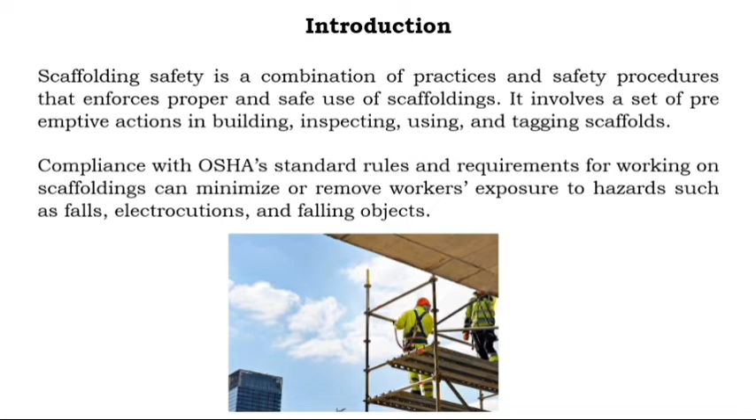Scaffolding components: first, sole plate; second, base plate; third, standards; fourth, ledgers; fifth, bracing; sixth, decking; seventh, guardrails, that is handrails and midrails, height approximately 1 meter; eighth, toe board, should be minimum 6 inches in height; ninth, clamps standards EN 74 and BS 15; tenth, the ladder shall be secured at 3 locations; eleventh, tags, either green or red, and shall be renewed after 1 week.

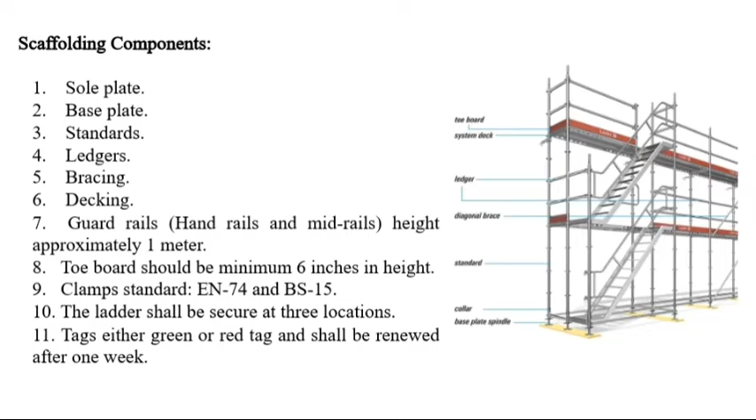Following photos showing scaffolding components.

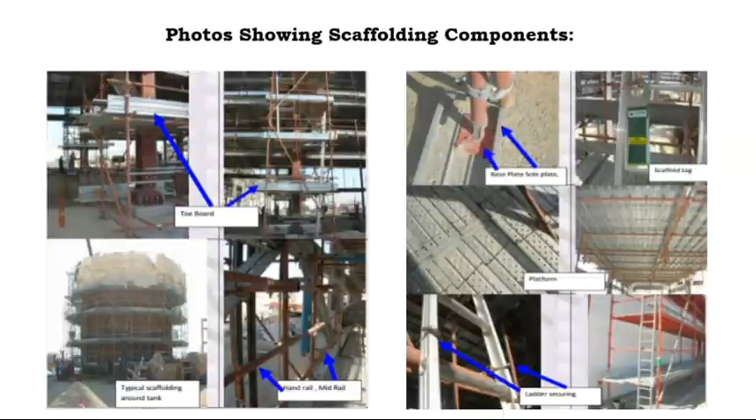Importance of scaffolding safety. Scaffolding safety is important because it can help prevent workplace incidents from recurring. With baseline scaffold requirements to keep workers safe, such as better inspections, training, and controls, frontline teams can ensure scaffolding safety and be proactive about building a safety culture from the ground up.

To ensure scaffolding safety, the scaffold must be built under the supervision of a competent person, someone who has been thoroughly trained on safe work practices when working on scaffoldings, and workers must be trained by a qualified person before they use the scaffold. The scaffold and its components should also be checked by a competent person and properly tagged before the start of the shift to ensure its integrity and safety.

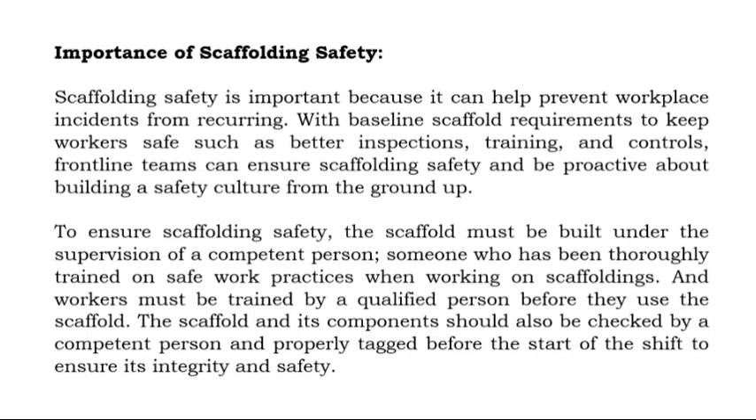Three types of scaffolds. First, supported scaffolds, a type of scaffold that is supported by poles, frames, and outriggers and usually consists of one or more platforms.

Second, suspended scaffolds. Like the supported scaffolds, this type also usually consists of one or more platforms, but is suspended by overhead support and ropes.

Third, other types. These are man lifts, hoists, etc., which are often referred to as machinery and vehicle type of scaffold.

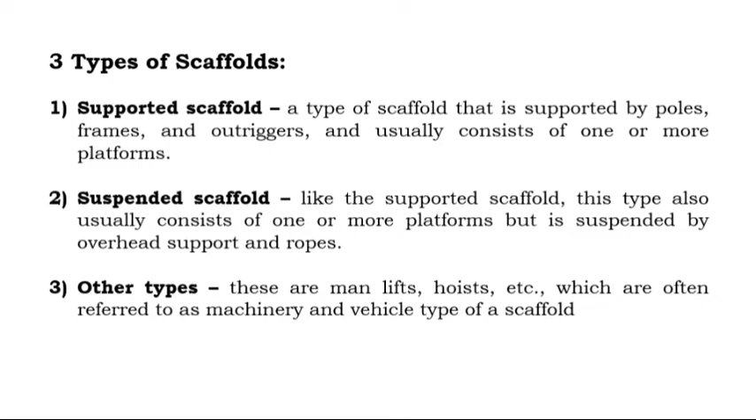Scaffolding rules. Here are the highlighted rules of OSHA's scaffolding standard. First, fall protection. Employees that are more than 10 feet off the ground need to be protected by using fall arrest systems or guardrails, except for employees on single point and 2-point adjustable suspension scaffolds. These employees should be protected by using both guardrails and a personal fall arrest system.

Second, guardrail height. The height of the scaffold's top rail that was manufactured and used in service after January 1st, 2000 should fall between 38 inches and 45 inches. Before this date, the scaffolding standard was 36 inches to 45 inches.

Third, cross bracing. The cross point of cross bracing used as a top rail should be between 38 inches and 48 inches above the work platform.

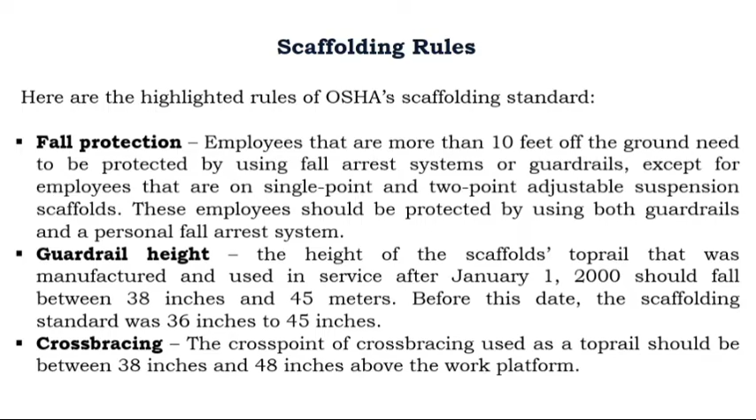Fourth, footings. Scaffold footings have to be leveled and have the capacity to support the loaded scaffolds. The legs, poles, frames, and other upright components should carry the weight of the base plates and mud sills.

Fifth, platforms. Scaffolds that are supported should be fully planked or decked.

Sixth, guying, ties, and braces. If the height to base ratio is 4:1, there should be support to the scaffolds to prevent tipping by guying, tying, and bracing.

Seventh, capacity. Scaffolding equipment should be able to support 4 times the maximum intended load.

Eighth, training. Employers are responsible for training each employee on the hazards and the methods to control these hazards. Ninth, inspections. This needs to be done at the start of every shift and after conducting work that could have affected the structural integrity of the scaffolding.

Tenth, mid-rails. This has to be installed approximately midway between the top rail and the platform surface. The cross point of the cross bracings used as mid-rails should be between 20 inches and 30 inches above the work platform.

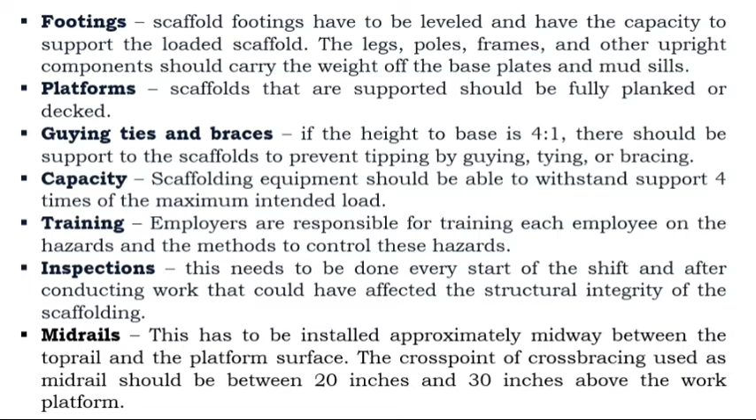Who is a competent and qualified person? According to OSHA, a competent person is one who is capable of identifying existing and predictable hazards in the surroundings or working conditions which are unsanitary or hazardous to employees, and who has authorization to take prompt corrective measures to eliminate them. This is typically someone who holds a scaffolding high-risk work license.

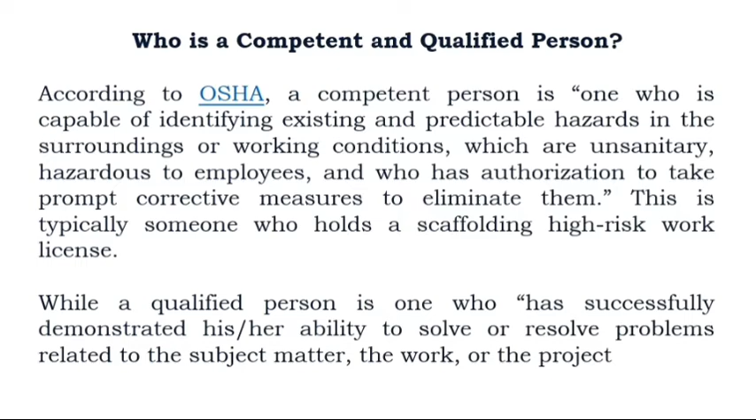A qualified person is one who has successfully demonstrated his or her ability to solve or resolve problems related to the subject matter, the work, or the project. A qualified person has the right background, such as education or a degree in designing safe scaffolding. For example, this could be someone from the scaffold manufacturer or a trained scaffold engineer.

The Bureau of Labor Statistics cites that 72% of scaffold injuries were due to scaffold planking or support giving way, slips, or falling objects. With regular inspections performed by a competent person, adequate scaffold safety training provided by a qualified person, and compliance with local regulatory standards, these dangers can be controlled.

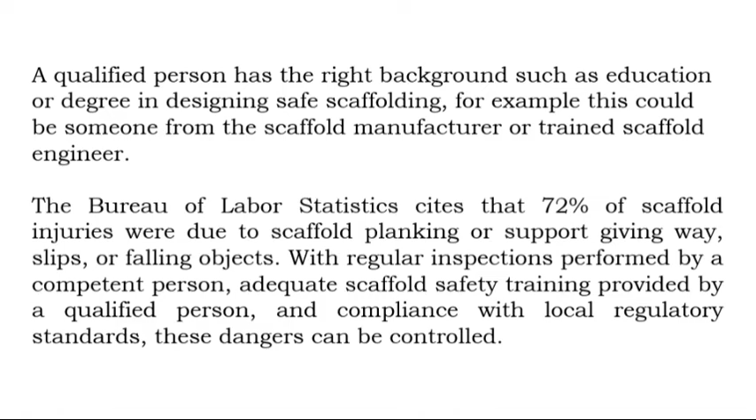Scaffolding safety do's. First, inspect the scaffold using a checklist or mobile inspection app before the work shift and ensure it is safe and in proper working order. Second, provide proper training. Third, have a toolbox talk before beginning work.

Fourth, wear appropriate PPE. Fifth, always check inspection tags. Sixth, know the weight capacity of the scaffold. Seventh, have a handhold above the scaffold platform. Eighth, level the scaffold after each move. Do not extend adjusting leg screws more than 12 inches.

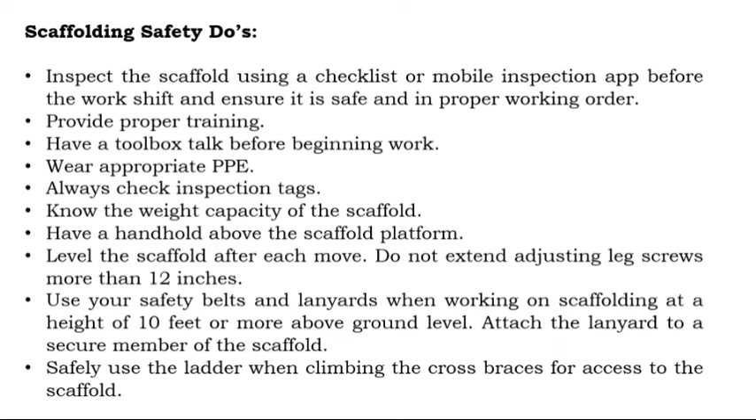Ninth, use your safety belts and lanyards when working on scaffolding at a height of 10 feet or more above ground level. Attach the lanyard to a secure member of the scaffold. Tenth, safely use the ladder when climbing, not the cross braces, for access to the scaffold. Eleventh, keep both feet on the decking.

Twelfth, stay off scaffolding during loading or unloading. Thirteenth, ensure planking is overlapping or secured from movement. Fourteenth, follow the manufacturer's instructions when erecting the scaffold under the direct supervision of a competent person.

Fifteenth, be mindful of co-workers working above and below you at all times, as well as others working on the scaffold. Sixteenth, use debris chutes or lower things by hoist or by hand. Seventeenth, chock the wheels of rolling scaffolds using wheel blocks and also lock the wheels by using your foot to depress the wheel lock before using the scaffold.

Eighteenth, always use netting to catch anything that falls.

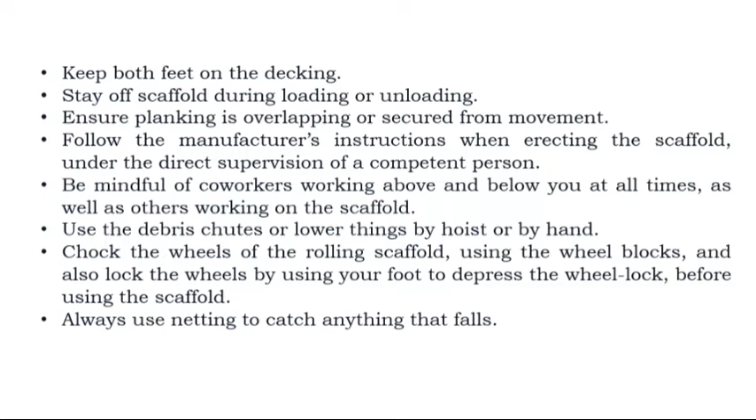Scaffolding safety don'ts. First, don't leave anything on the scaffold at the end of your shift. Second, don't overload the scaffold. Third, don't use unstable objects such as barrels, boxes, loose bricks, or concrete blocks to support scaffolds or to increase your work height, or use planks for that purpose. Fourth, don't work on platforms or scaffolds unless they are fully planked.

Fifth, don't use a scaffold unless guardrails and all flooring are in place. Sixth, don't stand on ties, guardrails, or extensions.

Seventh, don't use the scaffold if it appears damaged in any way, has been tampered with, or if there are components missing such as planking, guardrails, toe boards, debris nets, or protective canopies.

Eighth, don't walk on scaffold planking covered in ice, snow, or mud. Ninth, avoid using a scaffold during adverse weather such as heavy rain, sleet, ice, snow, or strong winds. Tenth, don't climb on any portion of the scaffold frame not intended for climbing.

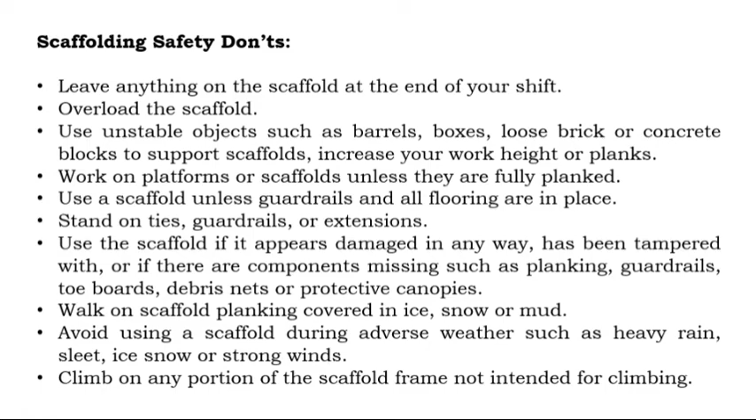Scaffolding tag system and meaning. Green scaffold tags mean the scaffold has been inspected and is safe for use. A green safe-for-use tag should be attached to the scaffold at each access point after the initial inspection is complete. The following image shows the front and back side of the green scaffold tag.

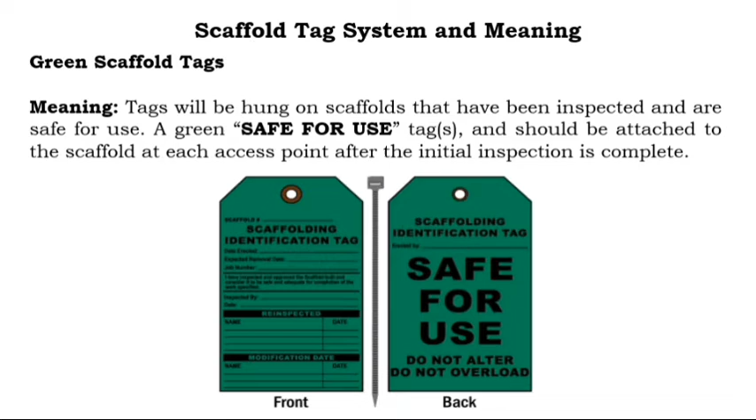Yellow scaffold tags, meaning caution tags, will replace all green safe scaffold tags whenever the scaffold has been modified to meet work requirements and, as a result, could present a hazard to the user. This tag indicates special requirements for safe use. The following image shows the front and back side of the yellow scaffolding tag.

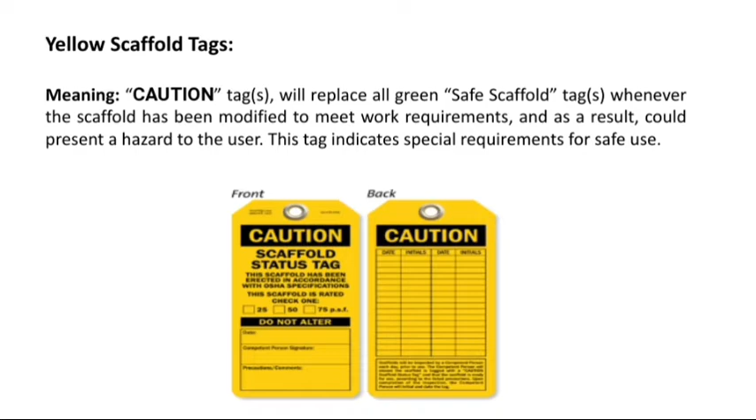Red scaffold tags, meaning danger, unsafe for use, will be used during erection or dismantling when the scaffold is left unattended, and will replace all green safe-for-use tags or yellow caution or hazard tags in the event a scaffold has been deemed unfit for use. The following image represents the red scaffolding tags.

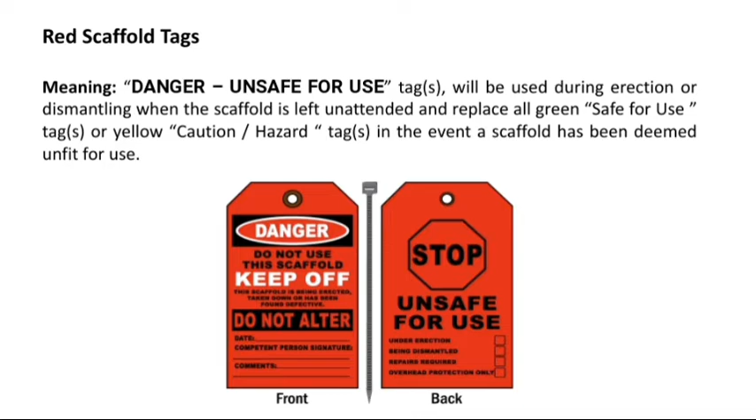Hazards of scaffolding. Apart from collapse, the principal hazards are: unsecured ladder slipping; use of unsuitable, damaged and faulty materials; inadequately supported scaffold boards; omission or removal of guardrails; improper tie-in bracing; and overloading of platform and board.

Improper safety measures when raising and dismantling scaffolding. Lack of guardrails. Overhead electrical wires and risk of electrocution. Planks slipping or breaking. Rolling scaffold. Overloading platforms. Climbing on scaffolding.

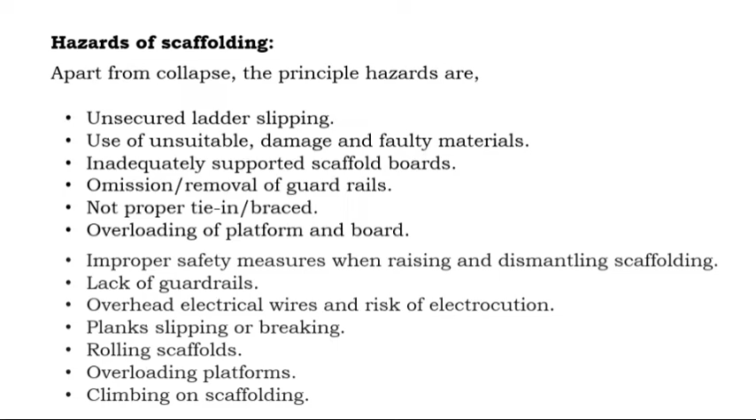Hazards of scaffolding. When erecting scaffolding, a common hazard is not providing an appropriate platform for the worker as they are installing the next lift. Also, failure to install tie-ins may result in the scaffolding swaying enough to topple someone off their working platform, especially when the platform is not sufficient. Accidents are frequently reported in situations where the worker was only working from a platform of 1 or 2 planks.

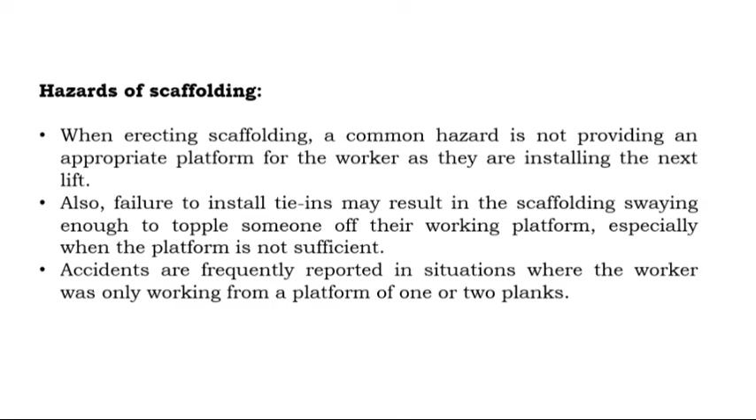Scaffolding safety regulations. All platforms on scaffold must be at least 18 inches wide. All platforms higher than 8 feet must have a full deck. Scaffolds must be able to support up to 4 times the load it is likely to bear without being overturned. Each scaffold must be designed, tested, and certified by a professional engineer.

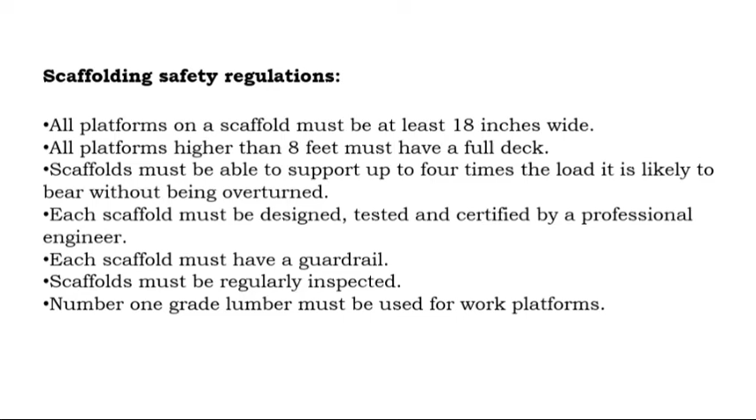Each scaffold must have a guardrail. Scaffold must be regularly inspected. Number 1 grade lumber must be used for work platforms. Working at heights training is mandatory for all employees on construction sites where workers may be at risk of falls.

Appropriate fall protection equipment must be worn for workers operating at a height of 3 meters, that is 10 feet or more. By following proper safety protocol, observing manufacturer's instructions, and being aware of any potential risks or dangers on a job site, most scaffold hazards can be avoided. For certain long term applications, some may be better served with permanent custom made platforms to access equipment.

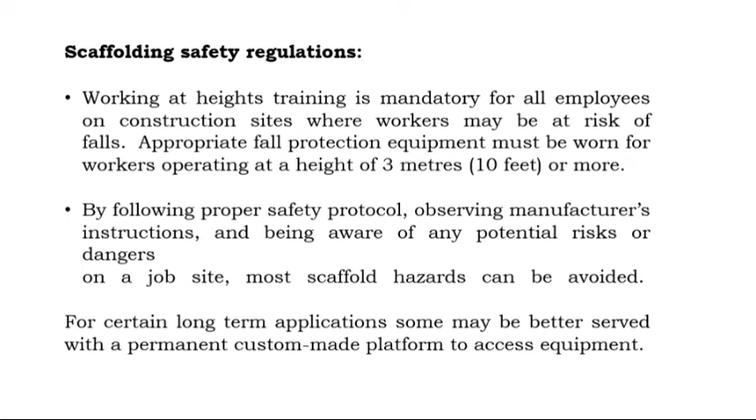General safety precautions for scaffolding. A competent third party certified person is allowed for scaffolding job. Cold work permit is required. Employees shall use chin straps, leather gloves and safety harness full time. Tools and spanners shall be secured with the body. Area shall be barricaded and signboards displayed.

Non-sparking tools shall be used in hazardous areas. Materials and clamps shall not be dropped or thrown. Leather bags shall be used for shifting. While erecting or modifying, a red tag shall be displayed at height equal to eye level. If the height exceeds the ratio, additional tie-in with nearby existing structure shall be given.

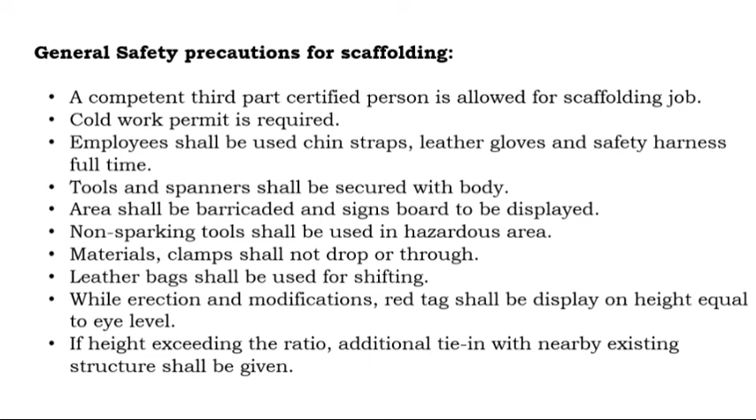General safety precautions for ladder safety. Ladder shall be of industrial type. Use the right type of ladder for the job. Inspect the ladder for defects and damage before use. Independent ladder shall be tagged, with validity of 1 month. Ladder shall be positioned at a 75-degree angle.

Ladder shall be secured with clamps at 3 locations. Only one person shall climb at a time and face the ladder during up and down movement. Do not carry tools and materials while climbing. Metal ladder shall not be used for electrical work.

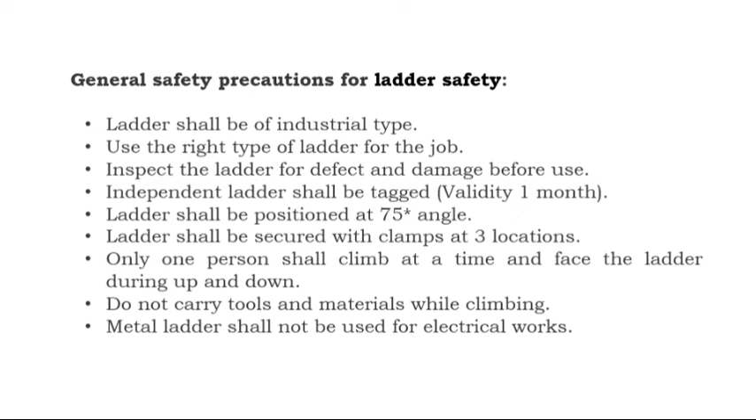Working at height or fall prevention. Falls are a leading cause of injury in all levels of the workplace. These are caused by slipping on the surface, tripping by obstacles, and while stepping off an elevated surface. Keep the workplace free of obstacles and clutter. Keep the walking surface clean and dry.

Block or barricade the area while cleaning floors. Wipe up spills immediately or barricade the area. Report hazards on the surface immediately. Avoid running cables or cords on the walkways.

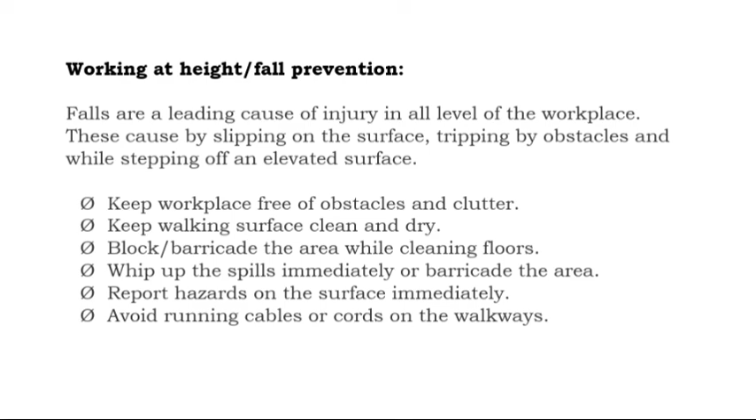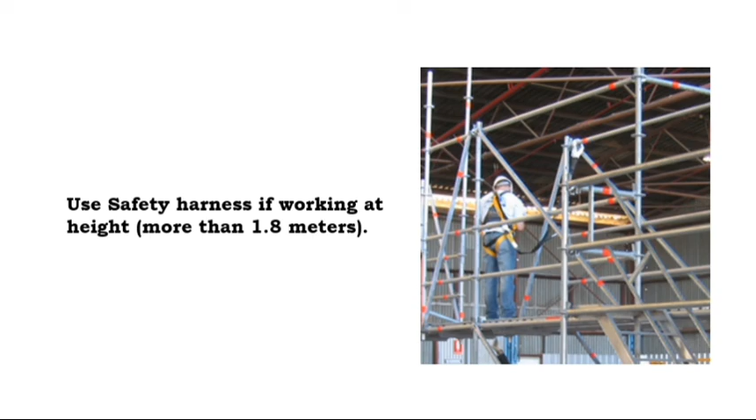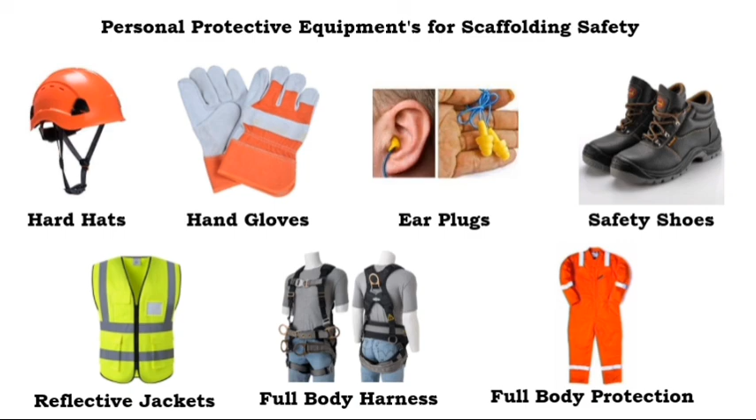Personal protective equipment for scaffolding safety: hard hats, hand gloves, earplugs, safety shoes, reflective jackets, full body harness, and full body protection.